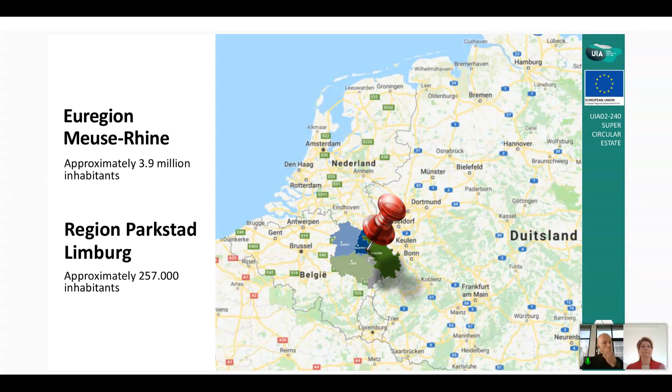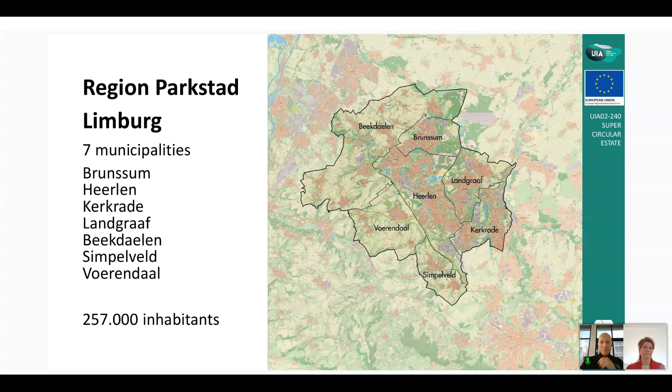Let me start with telling you where we are situated right now. We are situated in the Meuse-Rhine region with almost 4 million inhabitants. The region Parkstad consists of more than 250,000 inhabitants, exactly where the red pointer is pointing to. Parkstad-Limburg is an administrative collaboration of 7 municipalities in the southern province of Limburg, one of the 8 metropolitan regions of the Netherlands.

The coal mining industry started industrialization in the late 19th century. This resulted in urbanization and agglomeration during that time. As you can see on the slides, the density of the buildings is rising, and by the end of 2015, we have an urban area in this region.

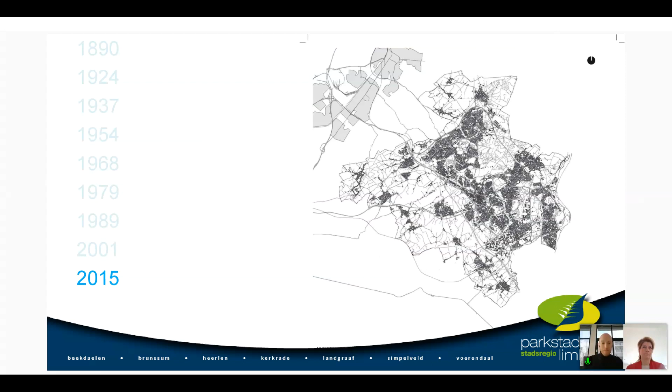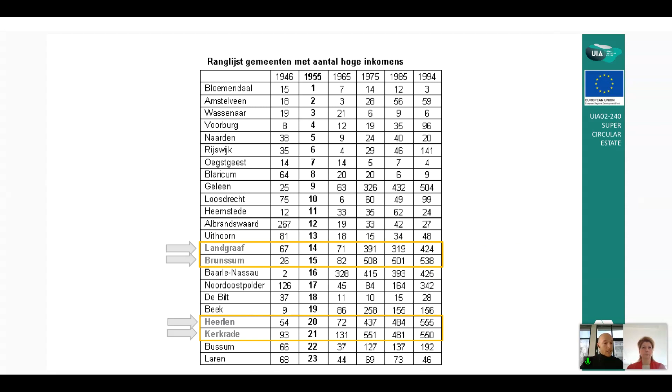Parkstad was therefore a prosperous region, and the large cities in Parkstad were high on the list of the most wealthy municipalities in the Netherlands. As you can see here, the 4 big cities in Parkstad were in the top 20 of wealthiest cities in the whole of the Netherlands.

But after that, the mine closed. Around 1965, the mine started to close, and Parkstad got its first big transformation task: we had to transform from black to green, meaning leaving the mining industries and starting to build a new economy. The closure of the mine resulted in the loss of approximately 17,000 jobs. You can imagine, with a population of 250,000, that is really a big amount. Therefore, we needed to create new jobs and needed help from the national government.

We are now facing a new transformation in the region. We have a decrease in population and therefore a major transformation task, physically, economically, and socially. Restructuring became a central theme next to socio-economic development.

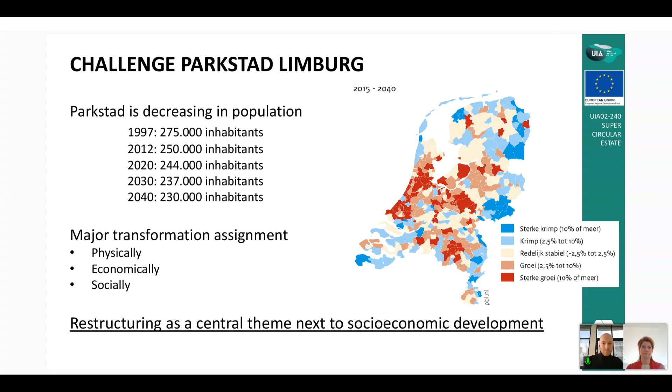If you take those 2 numbers, it means that in the next 10 years we need to demolish 7,500 houses, get rid of 130,000 square meters of retail and 20,000 square meters of offices, and also build 1,500 new houses that meet nowadays' standards and needs. So you can conclude that our task is a big one for the whole region.

With such a big restructuring and transformation task, you cannot ignore the circularity discussion. Circular building is a theme that combines the central themes within Parkstad: the restructuring and the socio-economic development. Therefore, Super Circular Estate is a really good example project for our region, because it's an integrated and innovative area development — not only from the reuse of materials, but also the reuse of social values. So its citizens are also an important part of this restructuring.

Within the region, we have a region deal Parkstad with a lot of new area developments. It's very important for us that we use the lessons learned from this project in future projects.

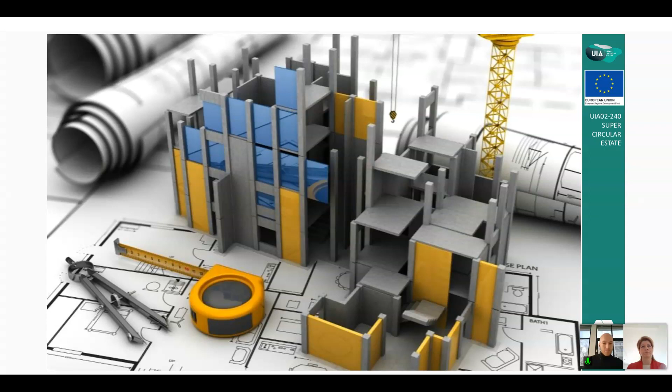And there is also, from my policy point of view, the restrictions in law and regulations. As an example, we faced an issue with the Building Decree Act, in Dutch called het Bouwbesluit. Within the law and regulations, we ran into certain problems when we wanted to reuse materials.

In this specific case, in the Super Circular Estate, we wanted to try. We could not comply with the Building Decree Act, because we wanted to build a ground floor at the correct height. As we lifted the whole thing directly from the flat, as mentioned in the previous sessions about this project,

we had the problem that the permit was not granting access, because the ceiling height could not be changed anymore, and therefore such problems should be solved.

And also the actual building, which was the start of this project, has been granted a permit as a structure, as a work of art, because otherwise it was not possible to get a permit for such a building.

It's therefore very important to make these matters negotiable, and legislation and regulations should be changed according to these new developments. In addition, it's also important that as a government, we ensure that we produce and develop flanking policy, to ensure that circularity is applied in the various domains.

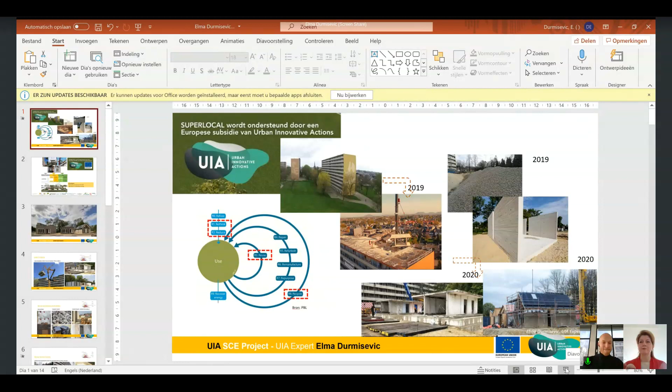Big enough? Yeah, perfect.

I will tell you more about the technical aspects of the Super Circular Estate project and the lessons learned. As Paul mentioned, there are quite many lessons learned, in particular because this is a really unique project in Europe. It is looking at and trying to understand the capacity of existing buildings and building stock to function as a bank of materials for new construction.

As Paul mentioned, the region of Parkstad and south of Limburg is facing a very ambitious urban transformation. Thousands of houses will need to be deconstructed and replaced by new ones, where the question would be: is there capacity in the existing buildings in Parkstad to set new standards for circular building, and use this urban transformation opportunity, which is already on the agenda, to make a swift transfer towards a circular economy in construction.

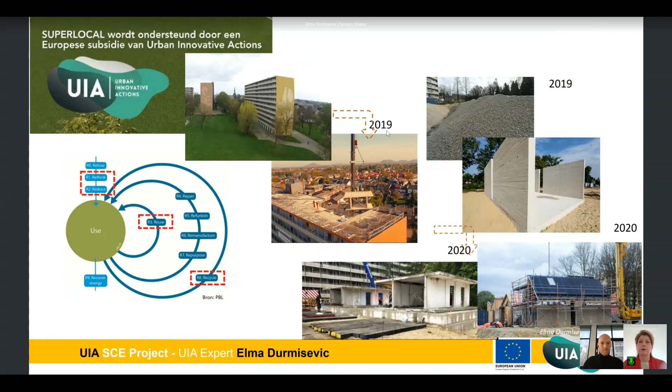The project aimed to literally reuse an existing building block and its materials, by deconstructing parts and reusing its elements and materials in the construction of three new circular houses.

In this process, the consortium of 12 partners basically had to reinvent protocols for each particular phase of developing such a circular building: starting from inventory, how do you analyze your building and its stability, the usability of its materials, how do you develop material passports. These are all steps the consortium worked through during the project.

Coming together, we also tried to understand the shifting roles of stakeholders in construction during the design and construction process, where the deconstruction company was not at the end of the building's life cycle, but played an important role in decision making at the initial design stage of a project, for example.

All of this had to be sorted out, and protocols needed to be developed in order to move the project further, and to decide which parts of the building would be reused, what would form the material pool for the construction of new houses, and how the new buildings would look.

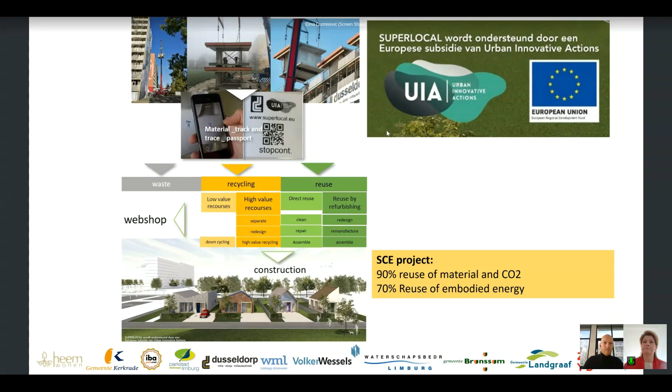This is the result. I'm sure you've seen these pictures already. There are the three houses built using materials from the neighboring 10-story building.

The consortium achieved the ambition of constructing new houses while reusing 90% of materials from the existing building. Almost 100 tons of reused material has been put into these structures, which is 90% of what you would otherwise need to construct them.

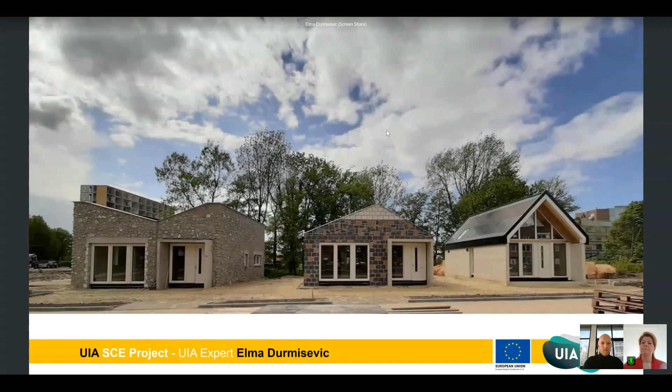Some 90% of CO2 has been saved by these actions, which is quite a big achievement for such a huge experiment. So the consortium tried to test a number of deconstruction and reuse strategies.

A building is a complex structure that can be dismantled in different layers, decomposed at different levels. We can talk about deconstruction at the building level, with bigger chunks of material, deconstruction and reuse of systems and components, down to elements, and I can go back to the material level as well.

The project tried to address all these levels of building composition and decomposition, and monitor the environmental and economic impact of these actions.

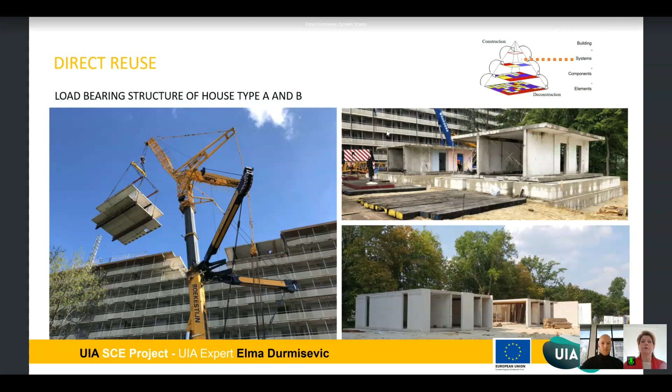At the highest level of reuse, direct reuse, big units have been reused. Of course, that required lots of engineering around the stability of the building and the elements that remain after cutting a unit out, and how you transport the units from the 12th or 10th story down to the ground, and so forth.

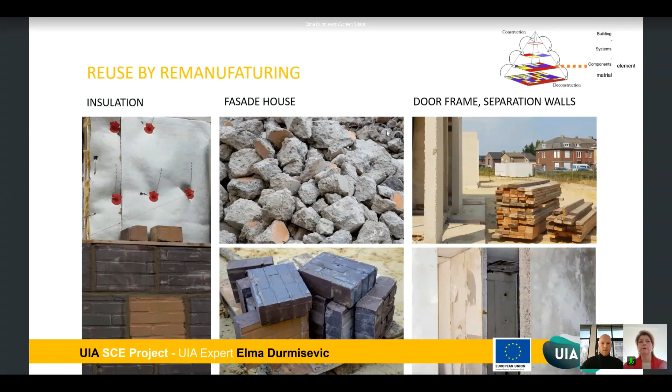The other level investigated was reuse by direct reuse or remanufacturing of components and elements of the building, by creating new facades or windows, and reusing doors.

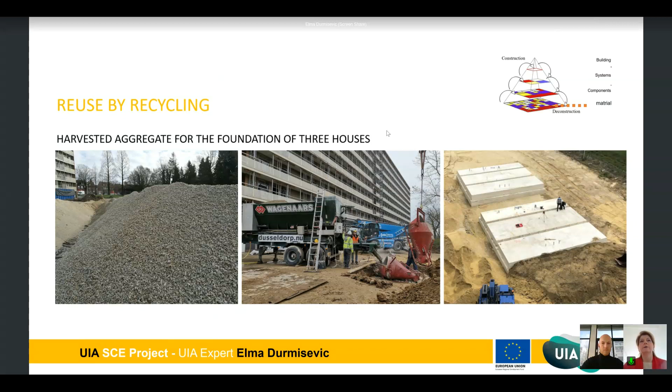The last level in the hierarchy of materials in a building is the material level, where recycling of existing concrete was tested, and a new methodology and technology developed to create new concrete while reusing 95% of the aggregate from existing concrete, which was quite a big achievement.

Through all these exercises, one of the driving forces was to try to understand how to revert what we call the linear material flow in linear building construction, through all phases of a building's life cycle: starting from extraction of raw material, production of elements, assembling in a building, using the building, then demolishing it, and basically throwing the material out and bringing it to waste disposal sites.

This is the linear way we've dealt with buildings up to now. This project tried to understand how this linearity can be reversed into circles, into circular recovery loops. When we talk about closing the cycles in the building and reuse cycles, we realize there are different sizes of these cycles. And the shorter the reuse cycle of an element, the better the impacts will be on the environment and economy.

So this, what you see here, is one of the exercises done on the recycling of material. That implies that the cycle of retrieving material is quite large, meaning there are many processes involved in deconstructing the existing building, creating aggregate out of that, and then processing it again into new material. And obviously that requires more energy, and it's more costly.

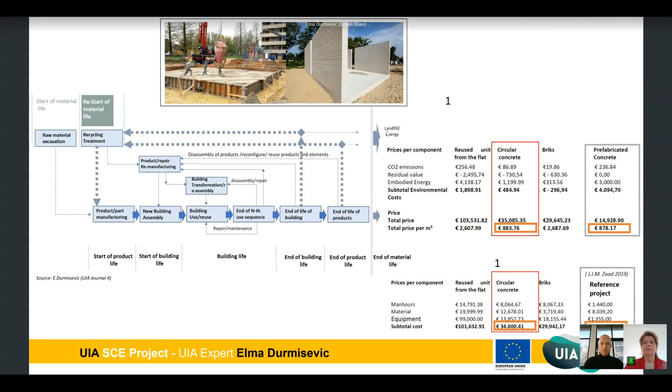When looking at the other cycle, closer, smaller cycles of reuse, like direct reuse of 3D units - this is quite an important conclusion actually - because, as I said in the beginning, the shorter the reuse cycle of an element from the building, the better the results will be for the economic and environmental impact.

Here we see an attempt to recover an element from a building which was never designed to recover elements from it. It is a static structure which needs lots of equipment and effort in order to take something out, and many safety measures also need to be taken into account.

So when looking at the impacts of recovering and directly reusing such huge elements from buildings which were not designed for recovery and reuse, we also see in the economic cost impacts that the financial feasibility of such an operation is not there. Basically, this kind of operation is almost three times more expensive than building a new structure in concrete.

However, on environmental impact, we see good and positive results of reusing this chunk from the existing building, primarily in saving of raw materials.

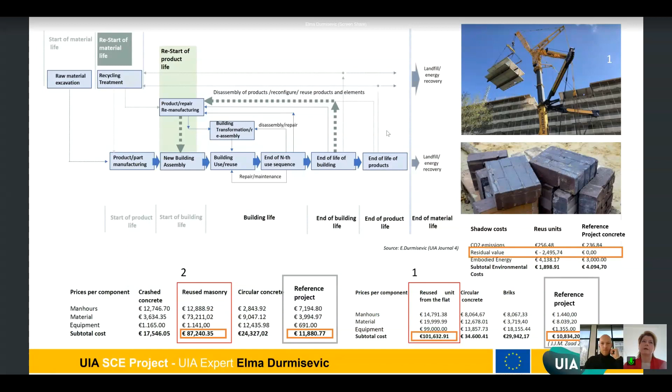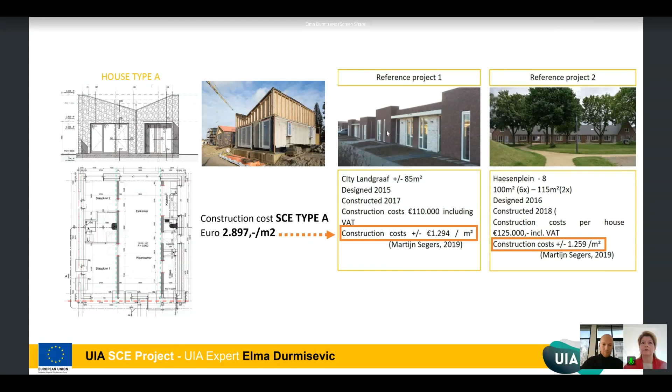So to summarize this part of the story, when in the end the cost calculations were made for the construction of the 3 circular estate houses, the square meter price is like 2.5 times higher than the conventional square meter price of a similar house built with similar materials.

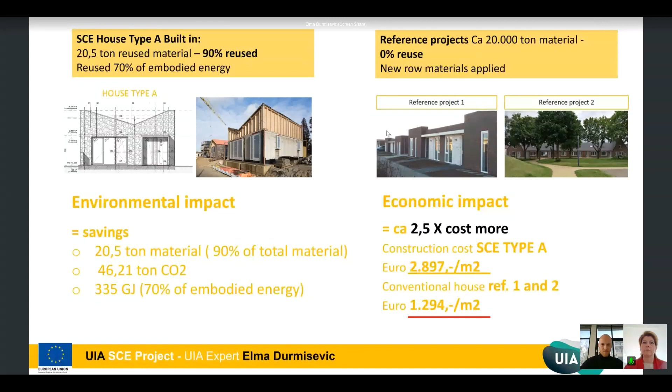This brings us to one of the important conclusions, and also recommendations for future policy developments that will support circular construction: although we see that buildings are built with very good, low environmental impacts - these buildings have reused 90% of materials, 70% of embodied energy, lots of CO2 saved - so on that side we are okay. But when we look into real economy and economic impacts, we see that such a building is 2.5 times more expensive than a conventional one. That comes primarily from the fact that we deal with buildings which were never designed to be recovered, dismantled, and their materials reused.

And therefore, the recovery operations are very complex. In this case, for hoisting this huge 3D unit, seven companies were involved, and you can imagine how much coordination work needed to be put in place. So that kind of operation is obviously not feasible, and that's quite an important lesson learned for the future.

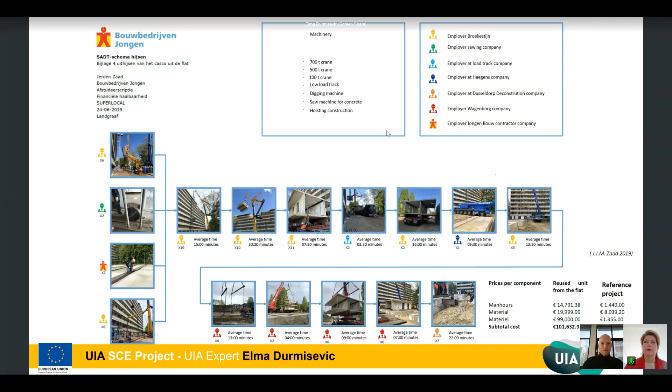When we look into the difference between linear or conventional construction projects and circular ones, obviously in conventional projects, when we talk about deconstruction, we talk only about the cost. The deconstruction and demolition of conventional buildings involves only costs, there are no benefits. Now we are trying to move to the circular world, where the costs of deconstruction can be matched with some benefits. And that's where we are now as scientists and policymakers, understanding how to optimize these benefits and level them with the costs in order to make sustainable circular construction projects feasible in the near future.

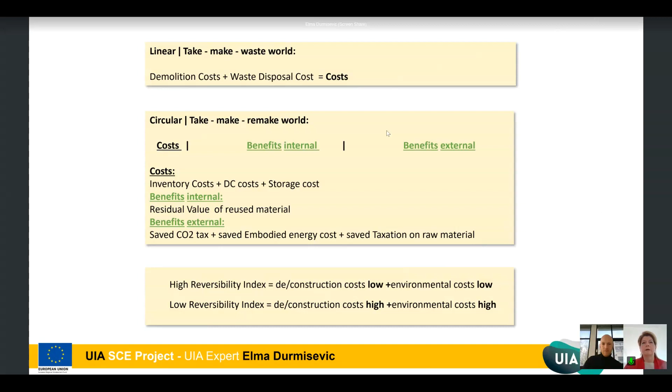As I mentioned, one of the quite straightforward lessons from the project is that for future buildings that need to be built, high reversibility of the structure definitely needs to be a must, as we know that high reversibility index results in low deconstruction costs and low environmental costs, and the other way around is also true. So my last slide would be about the main findings and recommendations, and I'll try to go through that quite fast.

Conventional supply chain hierarchy is not applicable in circular projects. As I mentioned at the beginning, the role of the construction companies, for example, is changing, and the deconstruction company becomes a supplier and therefore regains another position in the design and construction process. And that is true for other stakeholders as well.

Existing building stock, as already mentioned, was not designed to be deconstructed, and that is why recovery of materials is very labor intensive. Materials are damaged during the recovery process and they lose value. High labor costs, therefore, in deconstruction projects cannot compare with the low price of virgin materials. That's why we don't see many circular building projects popping up, because they cannot compete on the market.

With the existing taxation policy, Circular Estate savings in raw materials, as I mentioned, CO2 emissions and energy, are very high, but they are not reflected in the construction costs and market price at the moment.

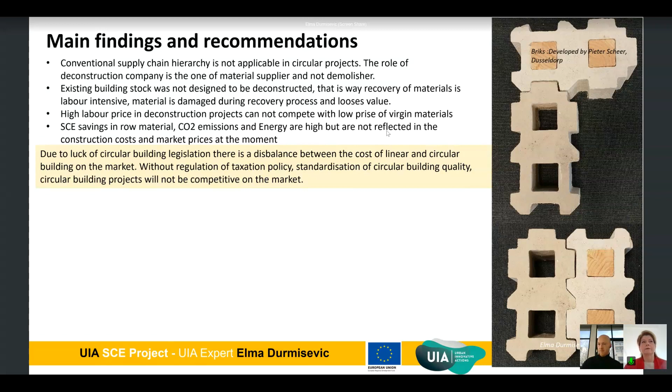There's a lack of circular building legislation at the moment. Due to this lack, there is a disbalance between the cost of linear and circular building on the market, and without regulation of taxation policy and standardization of circular building quality, what we see as standard circular building projects will not be competitive on the market in the near future.

The recommendations are also linked to a couple of additional things: internalize external costs such as CO2, embodied energy, waste disposal tax, and so forth as building costs; standardize circular building quality; and introduce a quota for the application of reused and recycled materials in new construction and construction products; prescribe reversibility index in new building standards.

Possible options for new taxation policies would be to reduce labor tax, increase taxation on raw material, increase tax on construction demolition waste, and introduce disposal fees for projects with low reversibility index or score.

The main takeaways are basically two, which you've heard quite often about. The biggest impact can be reached by designing new buildings with a high reversibility rate.

One example and tests that have been done during the Super Circular Estate project, where the bricks you see here on the right-hand side, have been developed as reversible components and parts which can be used to build new buildings and then reused in another one as well.

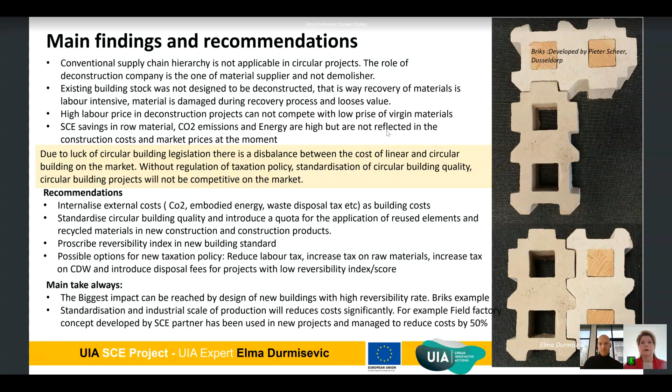The standardization and industrial scale of production will reduce costs significantly. And for that, there's also a nice example of a field factory that has been further developed for recycling of concrete, and huge savings have already been achieved in the construction of buildings with reused concrete.